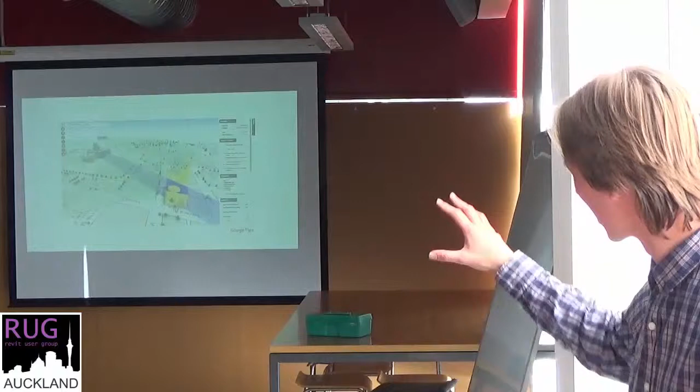This stuff is also becoming more and more - this is a website called Google Flux, so it's becoming easier and easier to access. What Google Flux does is it's a live planning tool. It's showing you all the planning conditions that drive a specific space in real time. What you can actually do is get all of that planning stuff visualized so you can interpret it as well. When you start thinking about this is what Google is doing, you can actually do this on a small scale, on a desktop, in front of your client, or anytime during the design process.

You end up with something like this, which is the Google Bayview Campus, produced by NBBJ. What's worth noting about this campus is that every single desk, every single point anyone sits in this entire building is at most 3 minutes walk from any other desk. And they know this quantifiably, because as they were designing it, they were pushing and pulling these volumes, manipulating all the different positions around the campus, and every single line was being computed in real time.

The reason NBBJ actually got this job was because they were able to handle the data at the conceptual stage. They were able to handle everything Google gave them and say, yes, we can give you absolutely quantifiable results. We can say yes, you want everyone to be able to reach everyone - here's the data in real time as we're in this conceptual phase. NBBJ got that job after 5 other firms were put on it and then taken off it. So that's thinking about that stuff at the urban scale.

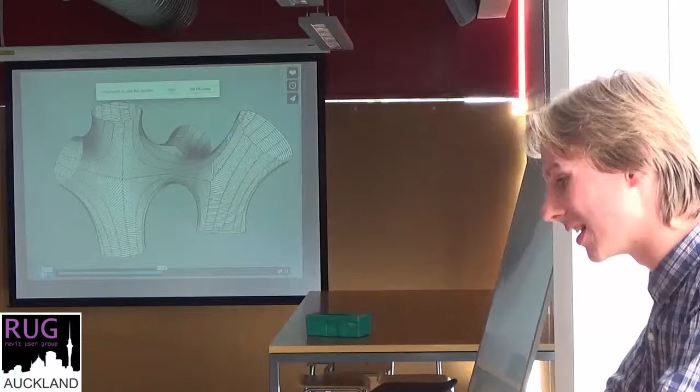Because they're developable strips, they can then be laid out flat. And because they can be laid out flat, they can just be simply cut out, and they can be produced just on a standard bed.

The way this is possible is because they are developable strips. The idea behind a developable strip is that it's any double curved surface that, if you can imagine putting your fist on one end of it and pushing, if you can do that and it can roll flat, then you can make it in 2D, and then form it back into the original 3D form.

And this is actually how they did it. They made these things in 2D, zipped them all together into a mold, and then produced this single flowing form, which they then unpacked. There's a larger installation of this that's about 3 stories. All of the concrete is just fine, which is crazy.

It's worth noting that this is one of the genius things, regardless of what you think of him: the genius behind Gehry's designs is that they are all developable surfaces, because they're originally designed in paper. If you start off with something flat, cut it out, and bend it into a crazy shape, then you know you can develop it. Normally, what we just experienced was them going the other way, getting something complex, working out how it's developable. He starts with the flat, curves it, and then builds it as though it's flat.

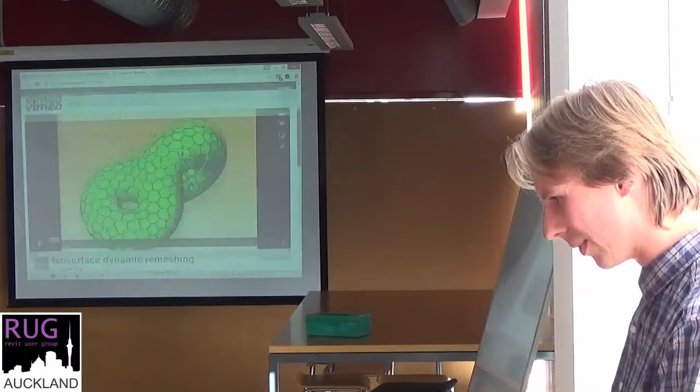This effect can be achieved after about 30 seconds of mucking around. What we're actually seeing is as this is edited and transformed, the panels self-propagate and lay themselves out in a way that is most beneficial to the panel, not so much relying on the maths.

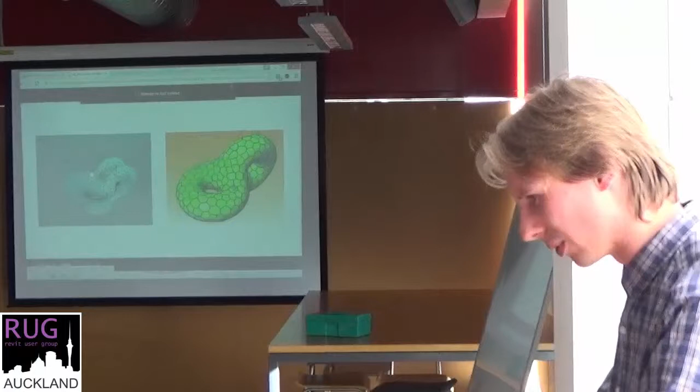Watching, because what we actually see from this one is that you can start using this technique to produce forms that are impossible to do currently using our current techniques. What we're doing at the moment in NURBS-driven stuff and maths-driven stuff is basically relying on the equations and the inputs of those equations to produce your form. This is entirely localized - as long as a point can form a triangle, you can get any type of surface you want.

And what we can see is that they can be edited panel by panel to be any density that they desire, and each of those things is of a consistent size and a bit easier to work with.

Sorry, let's do this again. So that's how we're doing this - we're going from a mathematical concept down to considering each panel as a living entity that is seeking out the best possible layout for itself as a panel.

And what we're actually seeing here is the Phare Tower, and this is the number of panels and the different types of panels transforming over time as they localize themselves into optimum fits and localize themselves to maximize on efficiency.

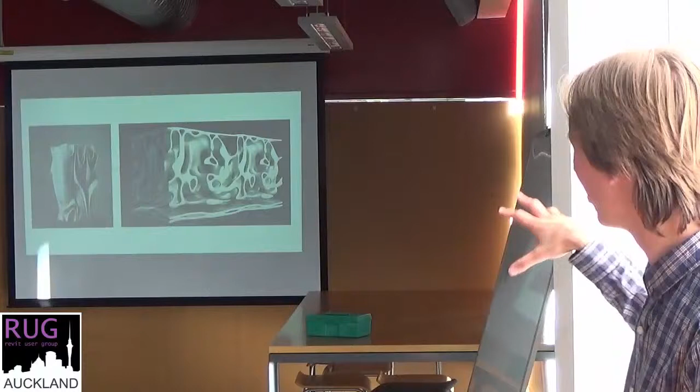Because you'd have to go through and draw a NURBS curve for every single element of his body, and the amount of detail you'd go into would be absolutely insane. And so you start being able to get these types of surfaces out of it. On the left, that's a sculpture, that one is a render. But what you can start to see is that you can get types of surfaces that are currently impossible to generate.

At an architectural scale, this is just a conceptual building, probably wouldn't actually work at all, considering some of the floors seem to be rounded. But what's key is that even though this is a very busy looking building, you can put your finger on it and track the entire surface all the way to the top and back to the bottom and find a continuous flow line the whole way through it, which is pretty cool.

It actually has relevance at the small scale, because what we can start doing is saying this square needs to be supported by this wall. Draw the force lines required to transfer that force, and draw it as a gradient of one being absolutely necessary, then change that gradient in order to create a perfect path and the perfect shape for that structure.

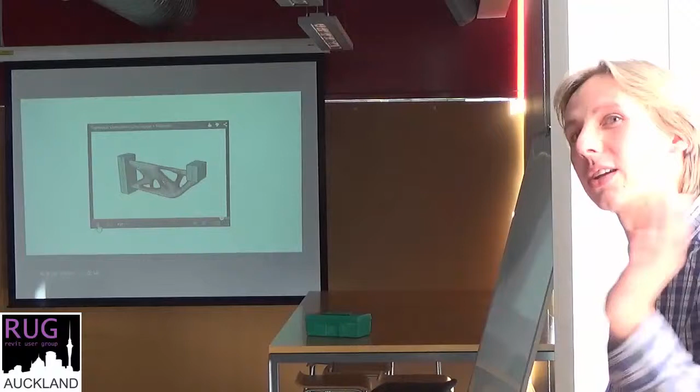So what we're seeing here is that structure developing over time. Again, this is just a free piece of software that you can have with this, and you can actually build that stuff in. So if this is purely under gravity load, you put any force you want and it will deal with it.

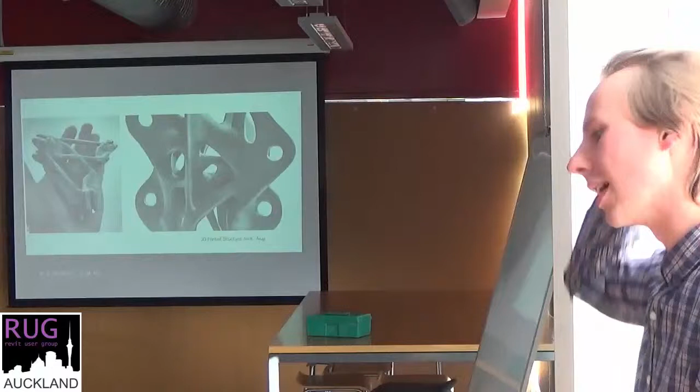What we're actually going to start to see here is a 3D printed structural joint developed by Arup, and this is the absolute optimum shape for that timber structure, for that steel structure. The key thing to note is that, according to their statistics, so I defer, a lot of that wasted steel in those structural joints being removed actually lightens the load by about 60% in some extreme cases.

So being able to strip all that information away and just get the absolute essential element, like reduced steel for that load, is a huge step. And what's cool is that, considering this is the absolutely optimum load path for this structure, you actually get an aesthetic out of it that you'd never consider to be rational or logical.

So this is an interesting piece, about the size of your hand. In terms of fidelity, it probably wouldn't cope, but again, with your slider, all you do is say, alright, thicken it up. It will thicken up in areas it needs to, and thin out in areas it doesn't need to.

So this is very, very new—only the last six months—but this test structure is going to be built, hopefully in the next couple of months, over in Australia. Every single joint in this entire structure is going to be a bespoke, one-of-a-kind system, though it's worth noting it's exactly the same piece of code, the same family that they're dropping into each one of those things.